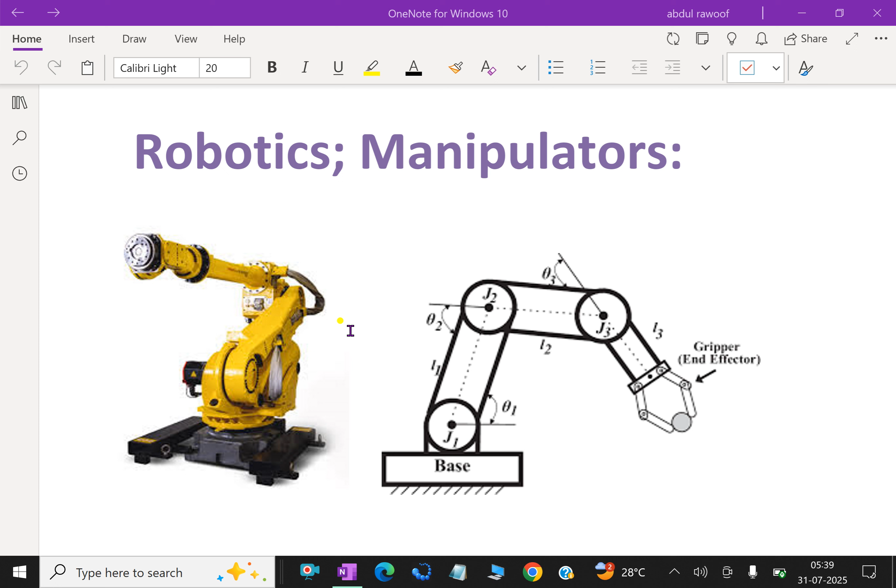Now we'll discuss further detail about robotic manipulators. Robotic manipulators, also known as robot arms, are electronically controlled mechanical devices designed to interact with their environment by performing tasks like lifting, moving, and placing objects.

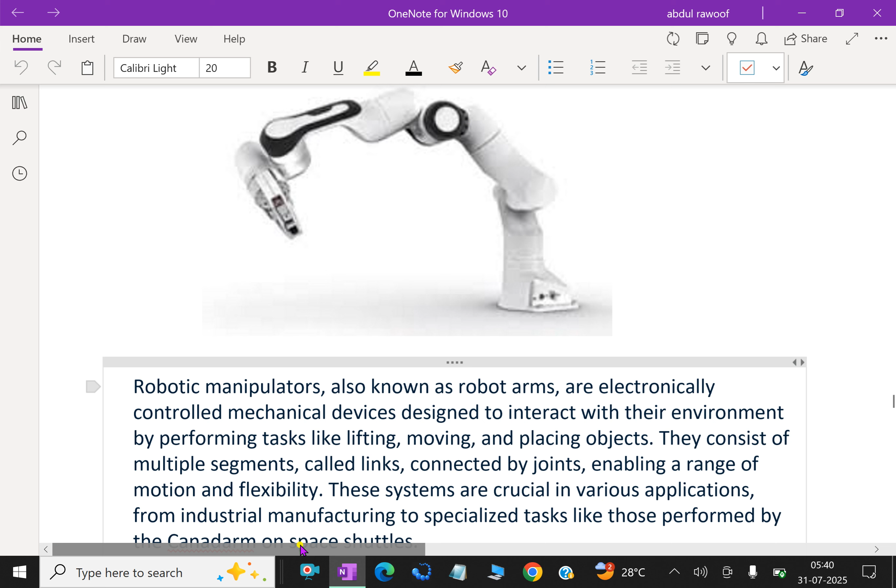They consist of multiple segments called links, connected by joints, enabling a range of motion and flexibility. These systems are crucial in various applications, from industrial manufacturing to specialized tasks like those performed by the Canadarm on space shuttles.

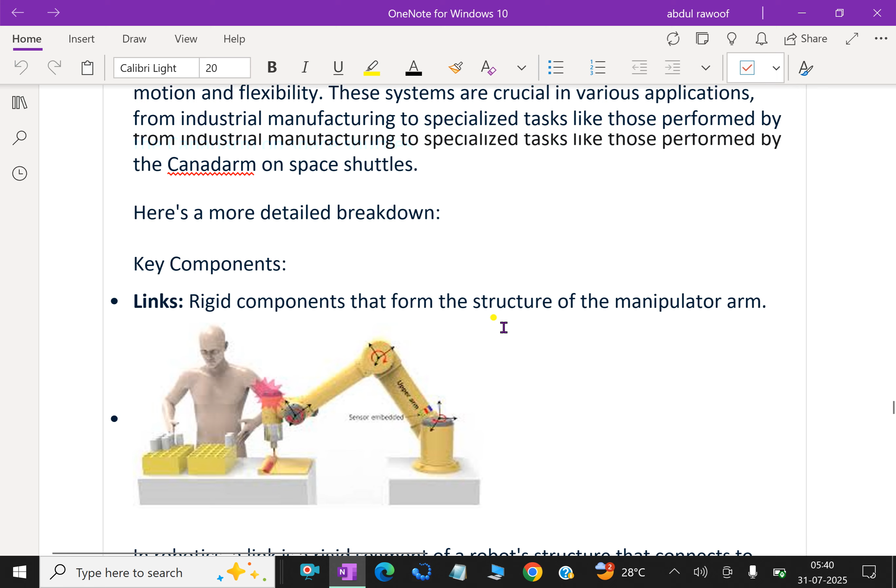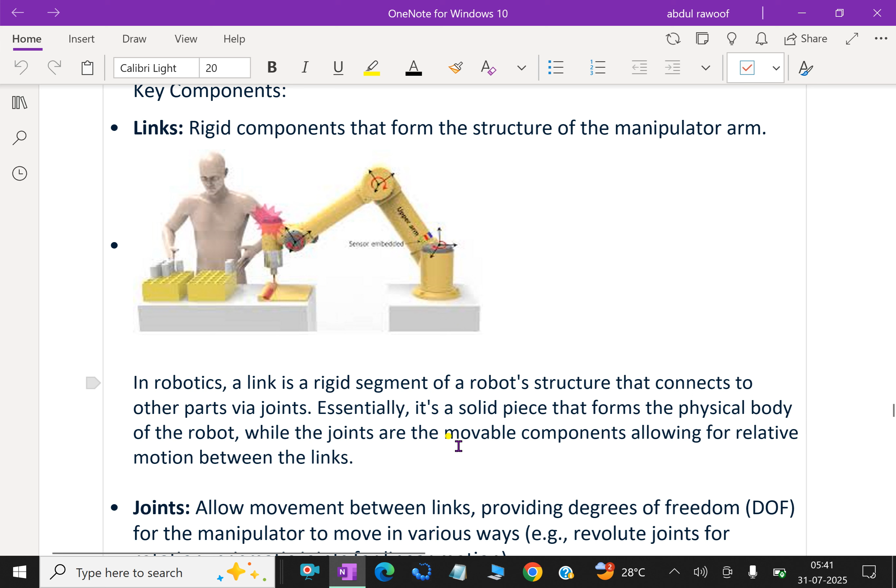Some key concepts: links are rigid components that form the structure of the manipulator's arm. This is called a link. In robotics, a link is a rigid segment of a robot's structure that connects to other parts via joints. This is a link, this is a joint. Essentially, it is a solid piece that forms the physical body of the robot, while the joints are the movable components allowing for relative motion between the links.

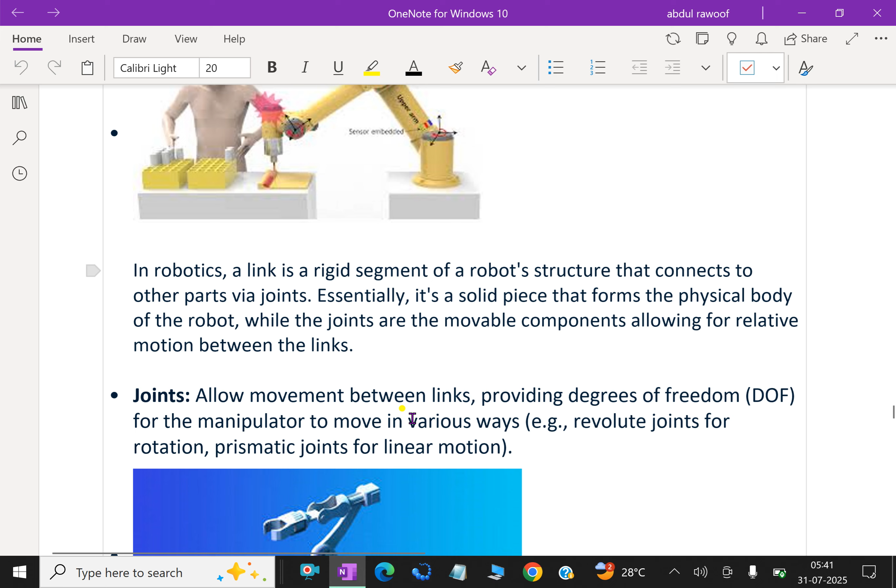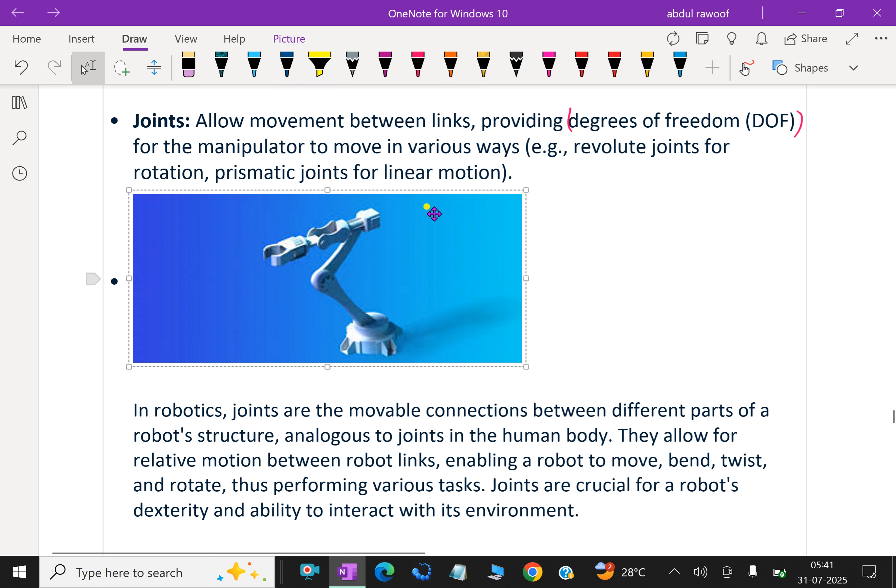Next, joints allow movement between links, providing degrees of freedom, or DOF - this is an important term - for the manipulator to move in various ways. Example: revolute joints for rotation, prismatic joints for linear motion.

In robotics, joints are the movable connections between the different parts of a robot's structure, analogous to joints in the human body. They allow for relative motion between robot links, enabling a robot to move, bend, twist, and rotate, thus performing various tasks. Joints are crucial for a robot's dexterity and ability to interact with its environment.

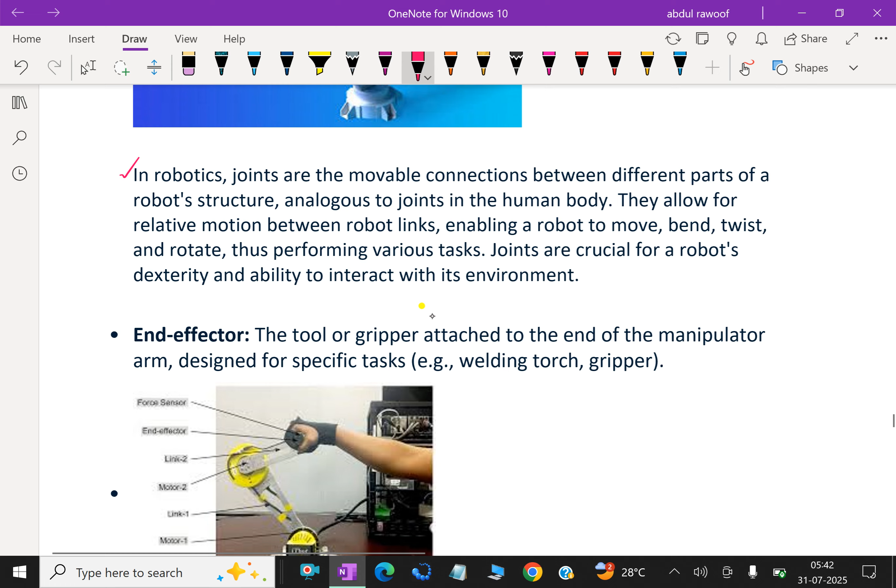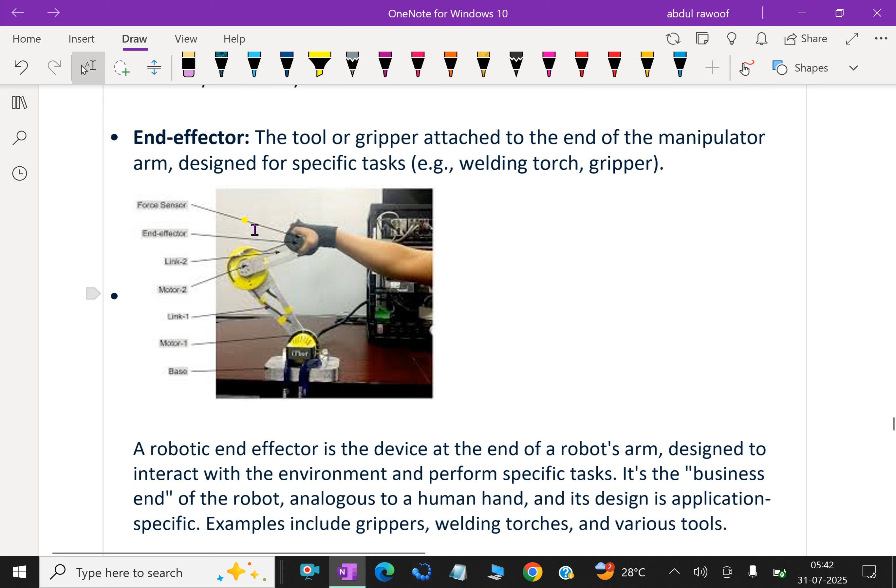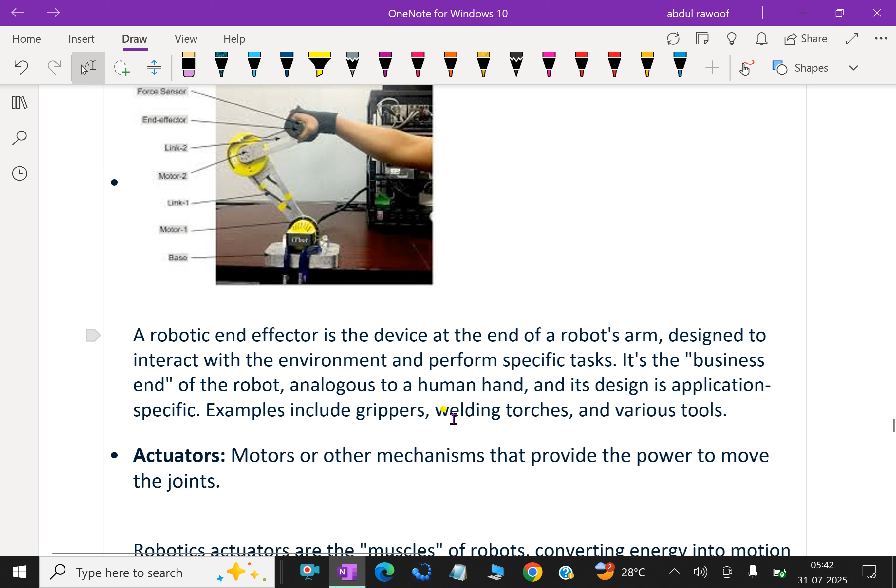End effector: the tool or gripper attached to the end of the manipulator arm, designed for specific tasks, for example welding torch or gripper. A robotic end effector is the device at the end of the robot's arm designed to interact with the environment and perform specific tasks. It's the business end of the robot, analogous to a human hand, and its design is application specific. Examples include grippers, welding torches, and various tools.

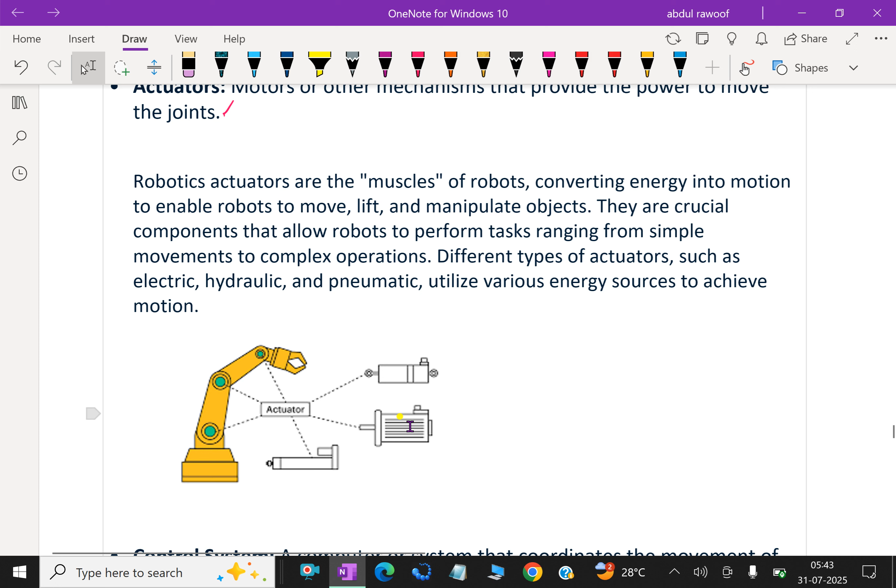Actuator: motors or other mechanisms that provide the power to move the joints - that's called actuators. Robotic actuators are the muscles of robots, converting energy into motion to enable robots to move, lift, and manipulate objects. They are crucial components that allow robots to perform tasks ranging from simple movement to complex operations. Different types of actuators, such as electric, hydraulic, and pneumatic, utilize various energy sources to achieve motion. These actuators actuate the different parts of the manipulator.

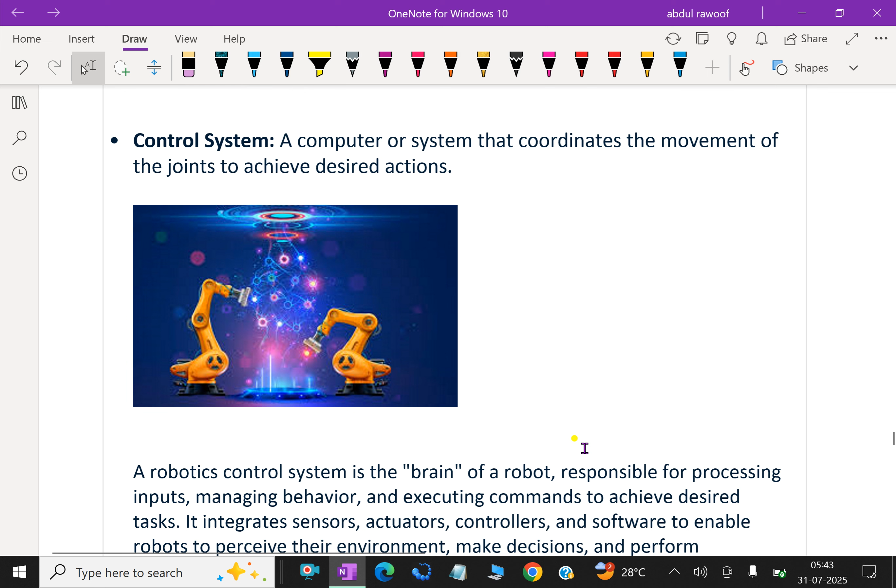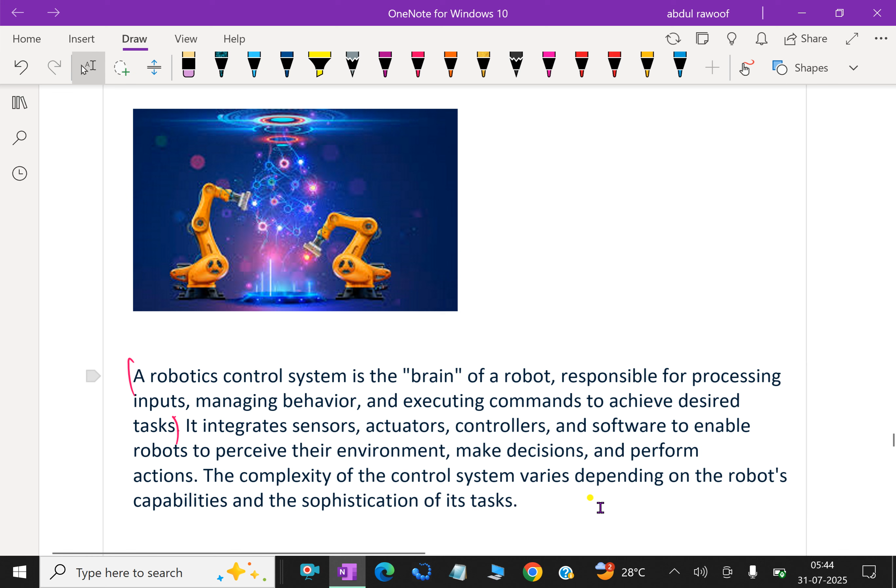Control system: a computer or system that coordinates the movement of the joints to achieve desired actions. The robotic control system is the brain of a robot, responsible for processing inputs, managing behaviors, and executing commands to achieve desired tasks. It integrates sensors, actuators, controllers, and software to enable robots to perceive their environment, make decisions, and perform actions. The complexity of the control system varies depending on the robot's capabilities and the sophistication of its task.

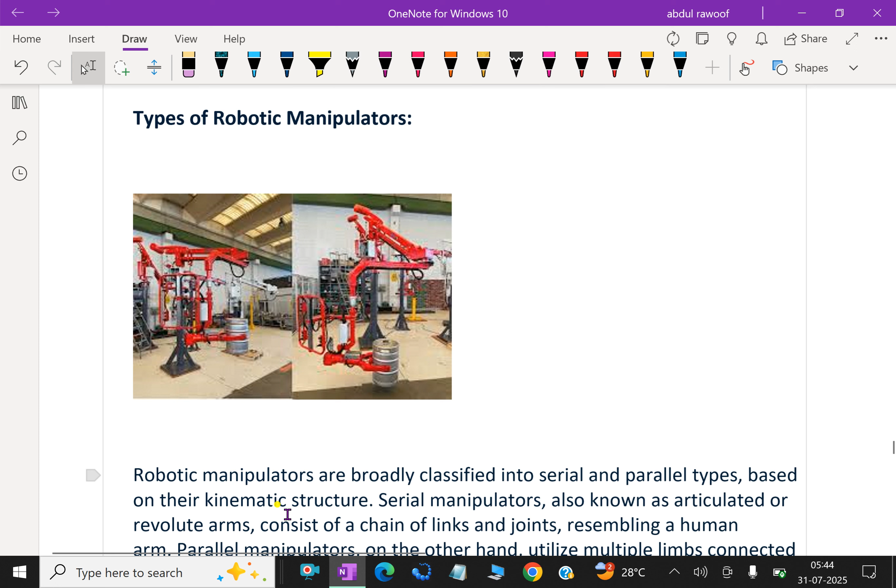Types of robotic manipulators: there are different types of manipulators. Robotic manipulators are broadly classified into serial and parallel types based on their kinematic structure. Serial manipulators, also known as articulated or revolute arms, consist of a chain of links and joints resembling a human arm. Parallel manipulators, on the other hand, utilize multiple limbs connected to a common end effector, offering high precision and load carrying capacity.

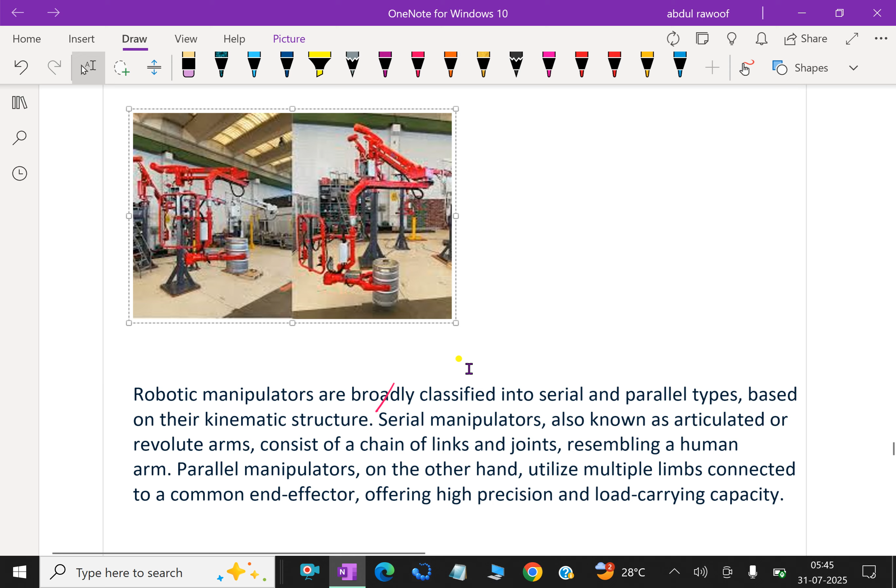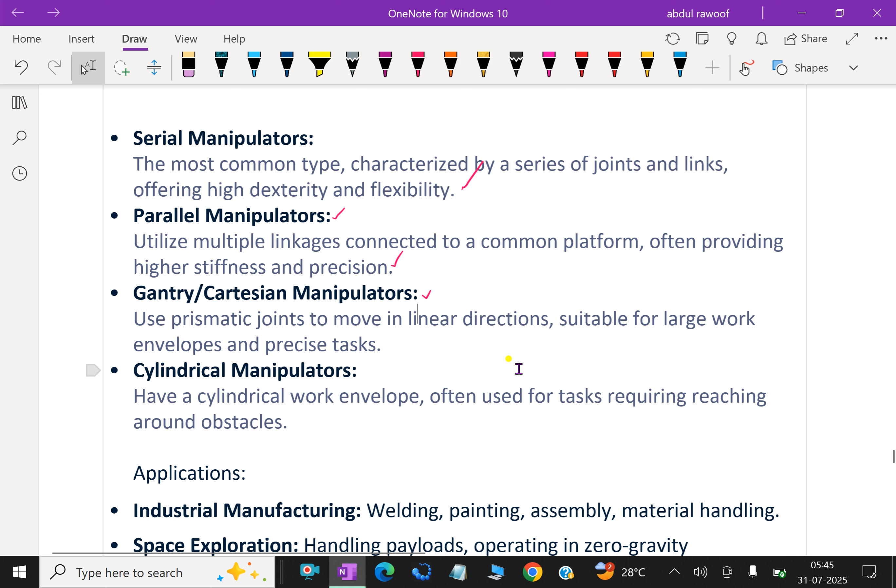Serial manipulators are the most common type, characterized by a series of joints and links offering high dexterity and flexibility. Parallel manipulators utilize multiple linkages connected to a common platform, often providing higher stiffness and precision. Gantry or Cartesian manipulators use prismatic joints to move in linear directions, suitable for large work envelopes and precise tasks. Cylindrical manipulators have a cylindrical work envelope, often used for tasks requiring reaching around obstacles.

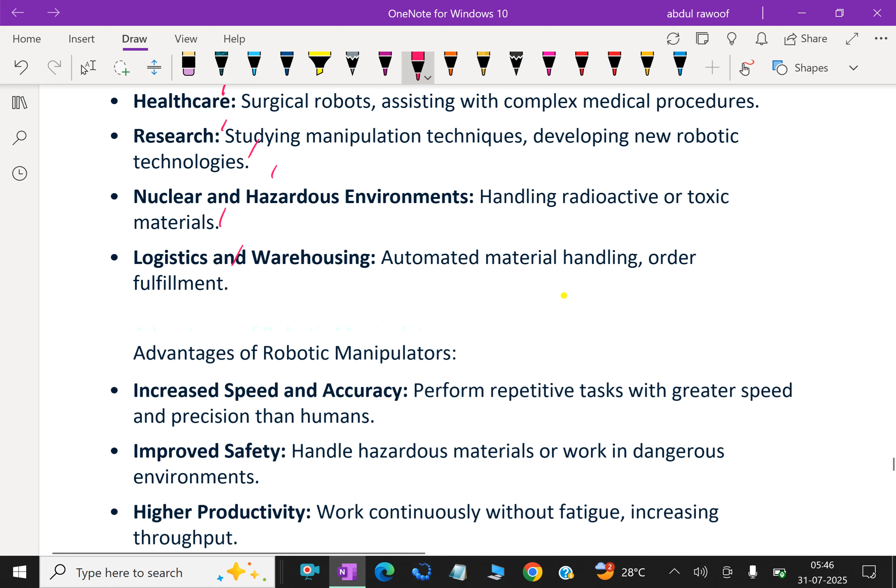Some applications: industrial manufacturing - welding, painting, assembly, material handling - these are the industrial uses. Space exploration - handling payloads, operating in zero gravity environments, such as the Canadarm. Healthcare - surgical robots assisting with complex medical procedures. Research - studying manipulation techniques, developing new robotic technologies. Nuclear and hazardous environments - handling radioactive or toxic materials. Logistics and warehousing - automated material handling, order fulfillment.

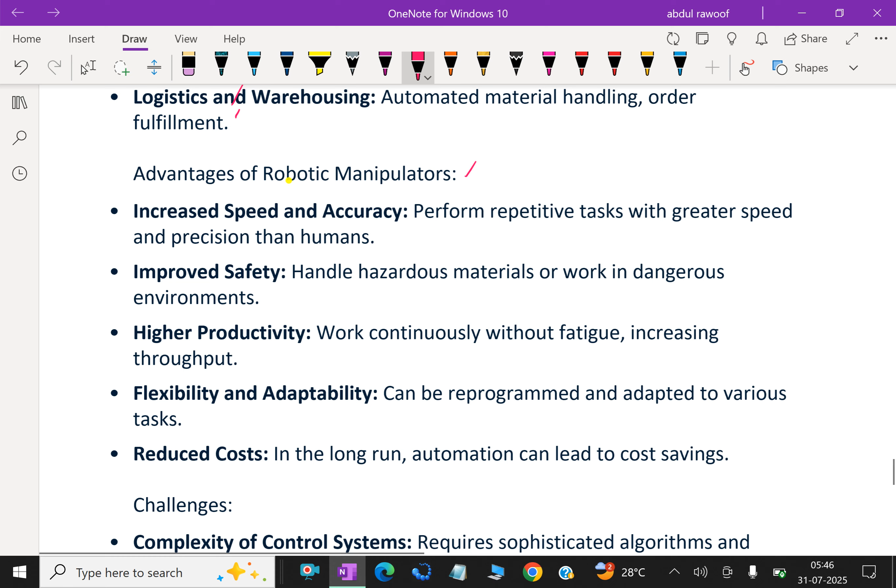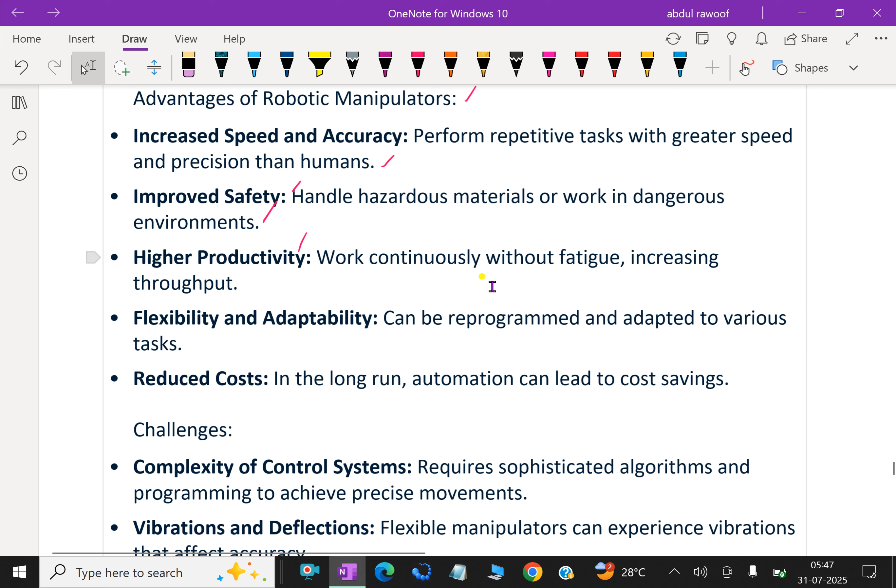Advantages of robotic manipulators: increased speed and accuracy - perform repetitive tasks with greater speed and precision than humans. Improved safety - handle hazardous materials or work in dangerous environments. Higher productivity - work continuously without fatigue, increasing throughput. Flexibility and adaptability - can be reprogrammed and adapted to various tasks. Reduced cost - in the long run, automation can lead to cost savings.

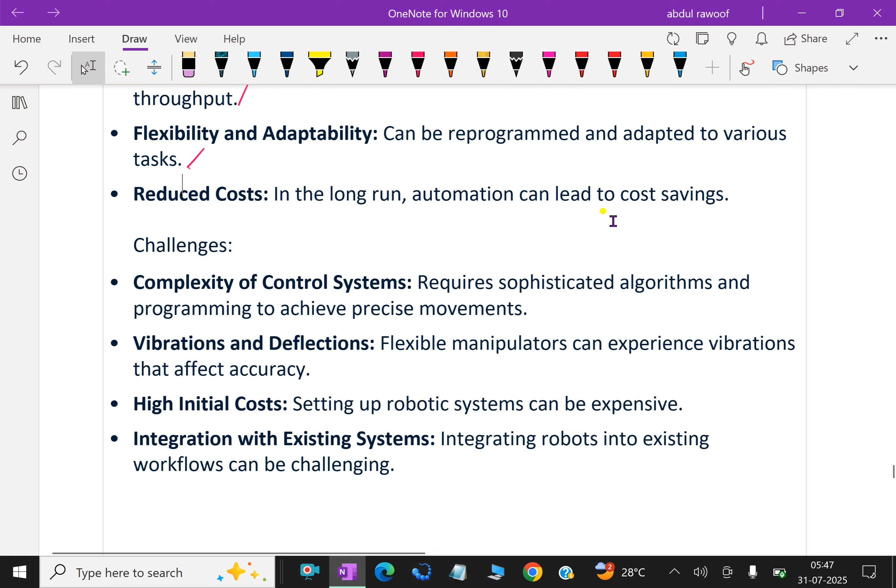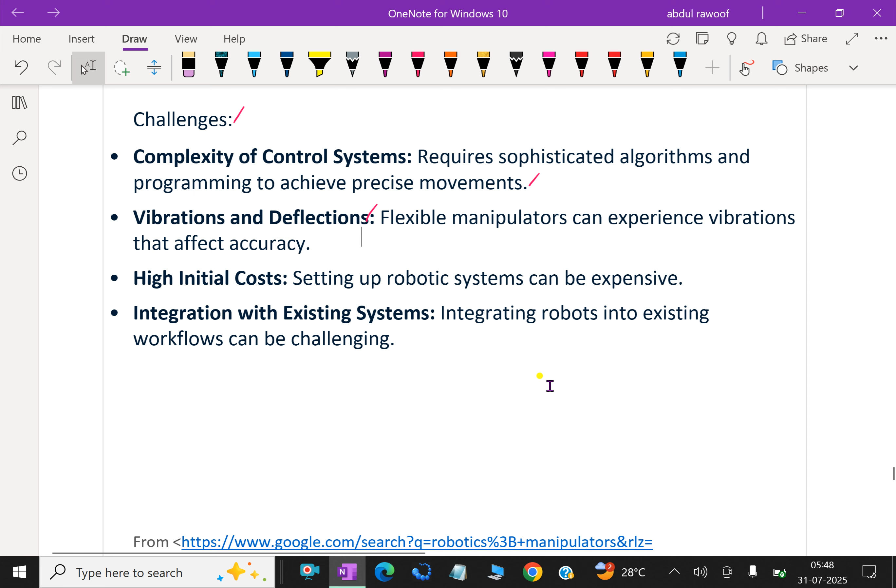Some challenges: complexity and control system - requires sophisticated algorithms and programming to achieve precise movement. Vibration and deflections - flexible manipulators can experience vibrations that affect accuracy. High initial cost - setting up a robotic system can be expensive. Integration with existing systems - integrating robots into existing workflows can be challenging.

So far we discussed about robotic manipulators and its working.